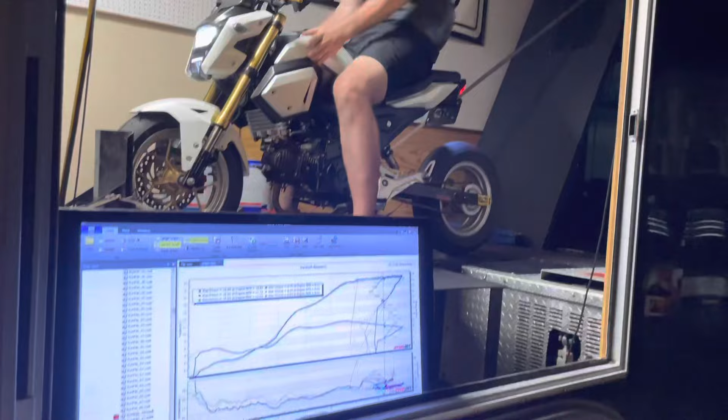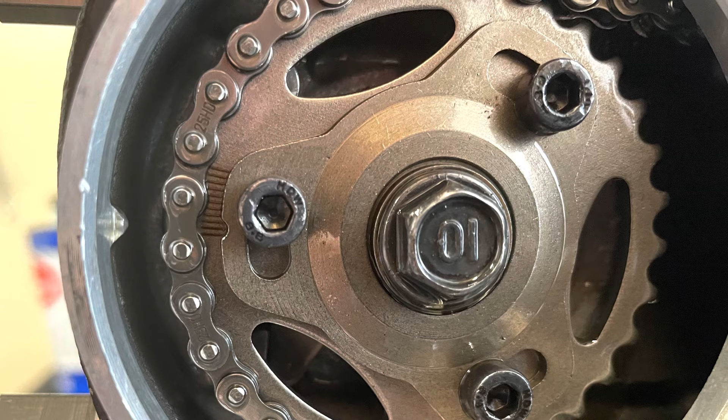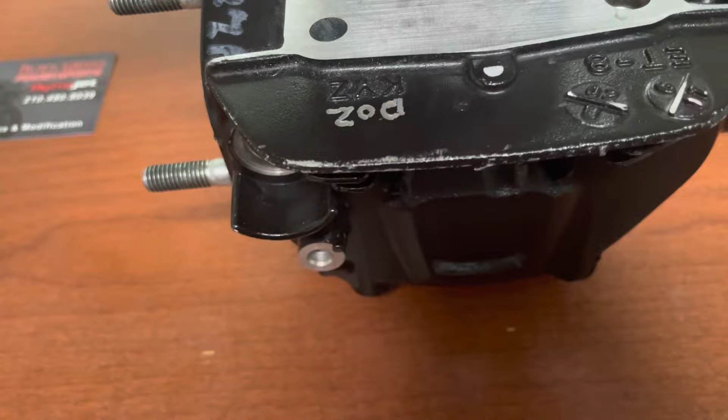Blasted, and we gas ported this one. Got it prepped for ceramic coat, and we got a 28mm valve on the intake with titanium, and then that is a 23mm valve. Currently she's on overlap with the cam in it. That is not an easy thing to get in there. We had to shave all sorts of stuff in order to get it to fit, but the piston is clearing on the pockets, so it's going.

Fresh coat of a new invisible type of ceramic. So if you're trying to meet some regulation problems, we can put this on and it doesn't look any different than aluminum. Got our ceramic coated head. We're going to clean up the valves with all these cutters.

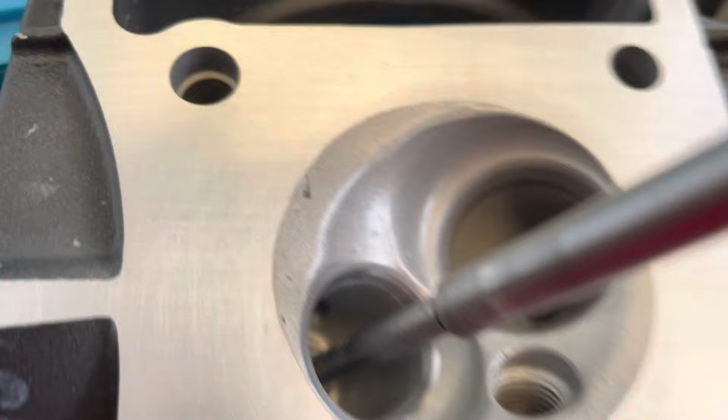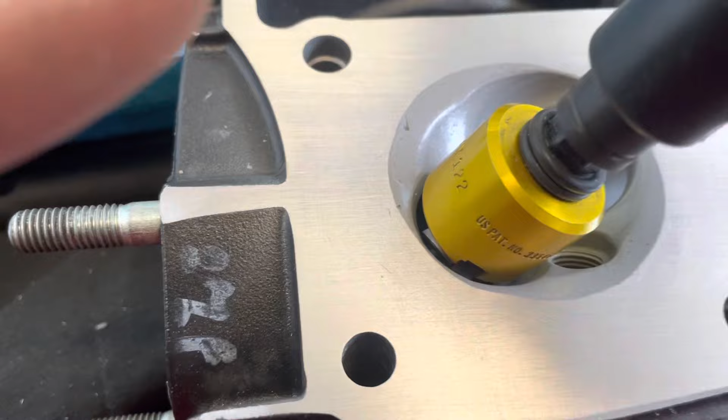Just got done with the 60. You can kind of see it in there. That's the 70 and 60. Then we got to hit it with the 45. 45 is this one over here. Kind of hard to hold the camera and see what this is doing, but we are just cleaning. We already cut these before, so we're just cleaning the ceramic that we got on the surface off.

Now you can see the 45 starting to come in. If the camera will focus, there it goes. You see 3 angles there. And we're going to do that on the intake. Intake should take a lot less because we leave the intake valve in when we coat it.

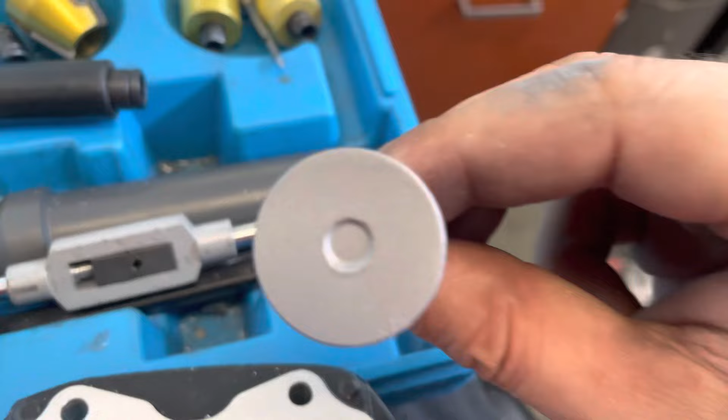We did coat the ends of the valves. This is a new coating for us. This allows it to look like aluminum when it's done, so nobody knows anything's been done. Alright, so here it all is after it's been cut. You can see all 3 angles on there. The other angles we cut before the coating. So we actually have 4 angles on the intake and 5 angles on the exhaust.

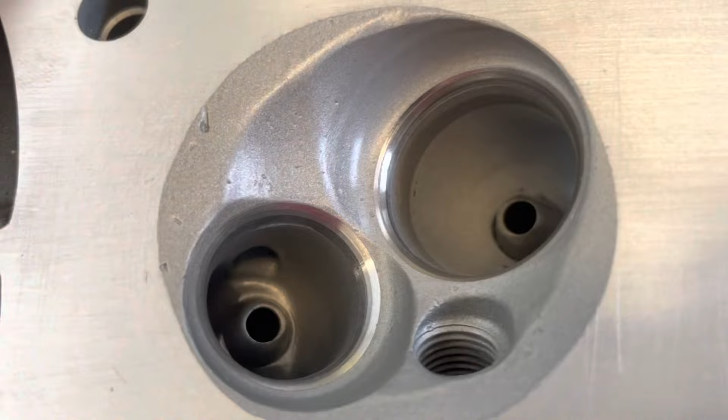All nice and ceramic. Sandblasted finish on the intake. And then we had some final modifications after the sandblasting for adapting to the KOSO intake. Here she is with the valves in. It's a 28mm. That's a 23, I think. 22, 23. And there's a downdraft setup of the intake. Lines up nice, clean flow.

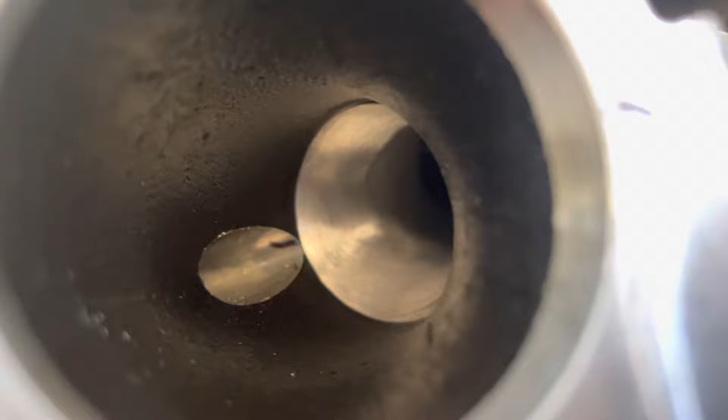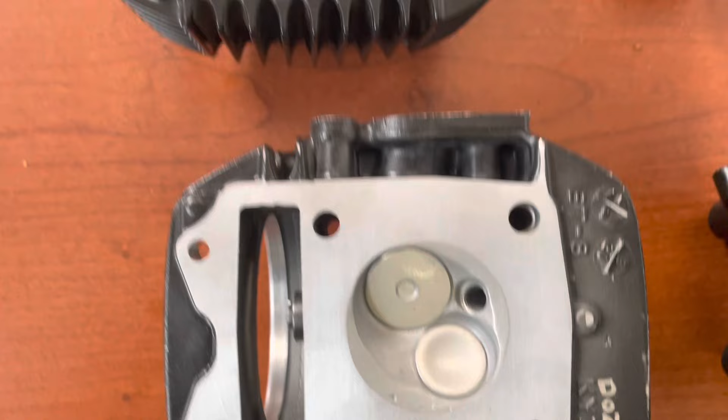Now let's get some springs in it. Straight shot for the fuel. Alright, ceramic coating's done. 28mm valve, 23mm valve. Still some nicks from before. There's the piston. Moved that wall back for the bigger valve, that one as well. And there's our 4 valve, ready to go again.

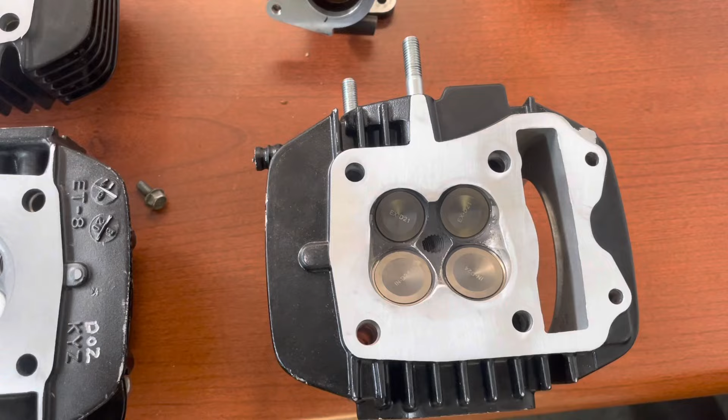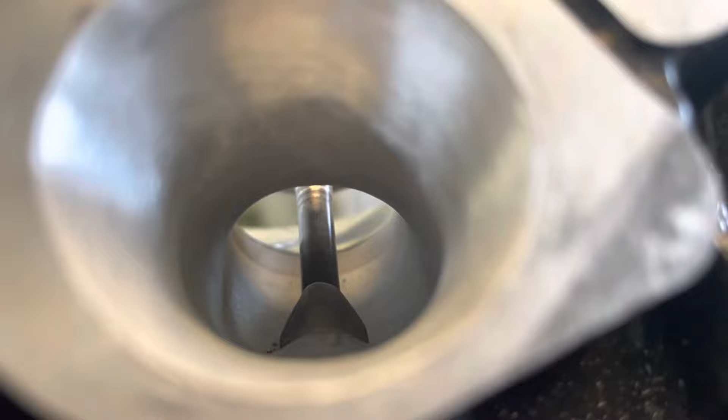And big fat intake. And here's line of sight without the elbow. Here's what line of sight looks like down it with the valve open. I want to cut this elbow, but the client doesn't want to.

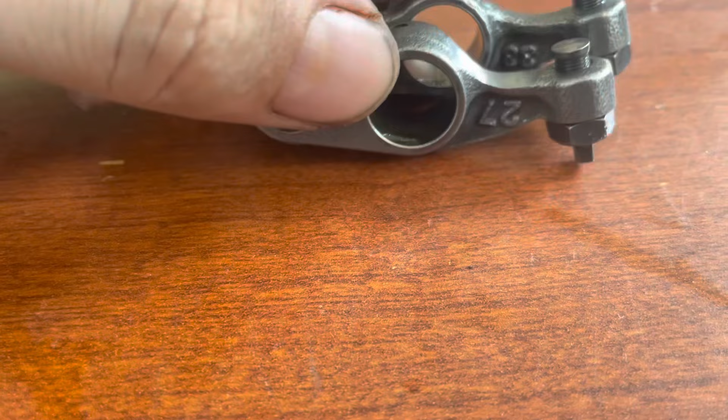Just a little bit of what we're doing to get the lift and the valve size and the springs that we need into this 125. We had to take material out of here to be able to clear the new keepers and collars. Smooth the backside just for giggles.

There's the exhaust in comparison to what it would be stock. So we may take some weight off of this one too, because we don't have a decompression, so that doesn't need to be there. Extra weight that just doesn't need to be.

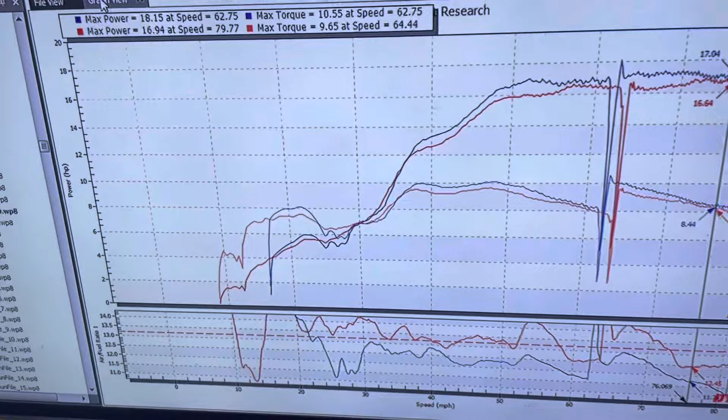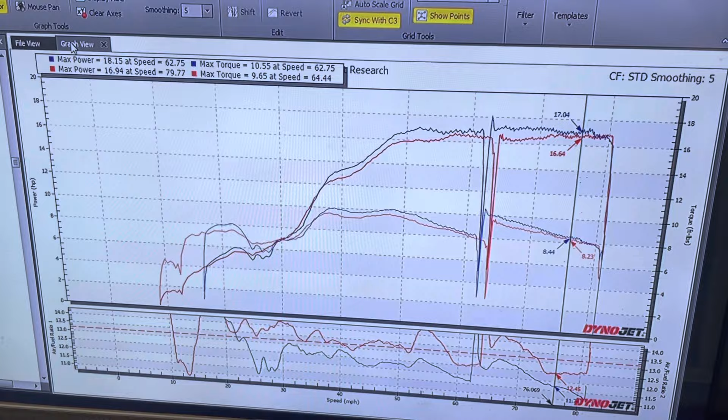Before and after of the 28 millimeter valve. Pulling a lot harder. Got pretty much the same graph. I might need to go back in and clean that back up after switching the intake. But she likes it a little fatter. And man, she's pulling hard. Gained a whole foot-pound of torque. I've seen one run with 11 foot-pounds of torque, but yeah, this is nuts.